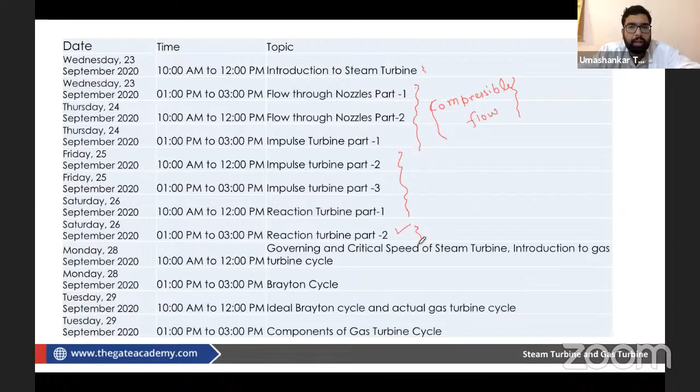So today we are going to finish with the steam turbine, and then we'll be entering the portion of gas turbine. Till this point we had already completed all the things about the steam turbine. Those who are live and have attended the previous lectures can respond to me whether everything is clear or not. We had a day off on Sunday, so I hope you have seen some questions on steam turbines as well.

So we have concluded with the reaction turbine, but there are some more things which can be asked from this topic, so we are going to cover that also. See why we are covering this, because this is what we have seen in theory of machines also, so with less effort we'll be covering more.

I think we must cover the governing of steam turbine also, because a 1 mark or 2 mark theory question can come from this topic. Governing is somewhat related to governors, which we see in theory of machines.

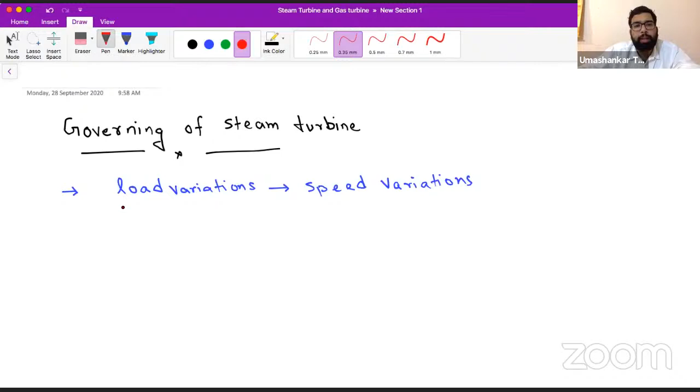We cannot 100% control this load variation. So what we want is a constant speed. Now somebody will say, sir, why do we want constant speed?

Now imagine we have a steam turbine, and it is not giving you constant speed - will it be able to produce electricity? Because this rotation is going to get converted into electricity in the generator part, which is the headache of the electrical engineer. Our work, as a mechanical engineer, is to give constant rotation to the electrical engineers so that they can produce their electricity from there, and then it's their headache what they will do or not do. So we will hand over to the electrical engineers after we give them the constant speed of the shaft of the steam turbine.

So we want to have constant speed. In theory of machines, you see two kinds of devices which compensate and provide you with constant speed - one is flywheel and one is governors. Flywheels are used for intra-cycle fluctuations, meaning due to the varying torque generated at the crank. So to compensate for the speed variations caused due to intra-cycle variations, we apply flywheel. But if the fluctuations are inter-cycle, meaning outside the cycle, like load, because we cannot control our load.

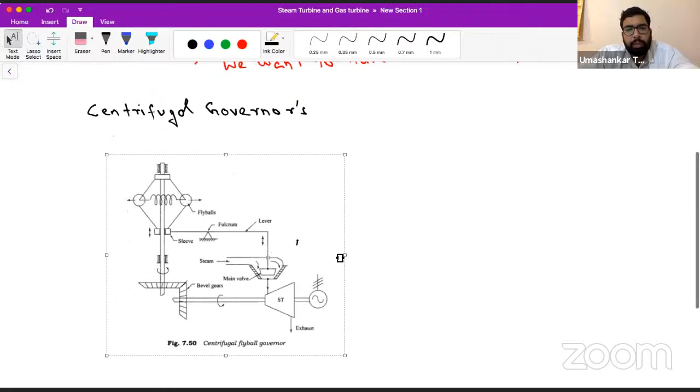We are not going to analyze these governor types in detail, but for basic understanding, let us look at a diagram. To save time, I have taken a screenshot from the book itself. Let's see how a governor works. This is the steam turbine, as you can see.

From this bevel gear arrangement, which you also see in theory of machines, what is happening? Bevel gear connects two shafts which are inclined to each other. Here they are at 90 degrees. This is the shaft of the governor, and this is the shaft of the steam turbine or rotor.

So the governor shaft and the steam turbine shaft are perpendicular to each other. They are connected by means of a bevel gear, with equal number of teeth and equal diameter.

Let's say D1 and D2 for these two gears, having the same diameter and same number of teeth. It means these two gears are rotating at the same speed. In that case, we can call it a mitre gear. You might have heard this term; a mitre gear is a special case of bevel gear.

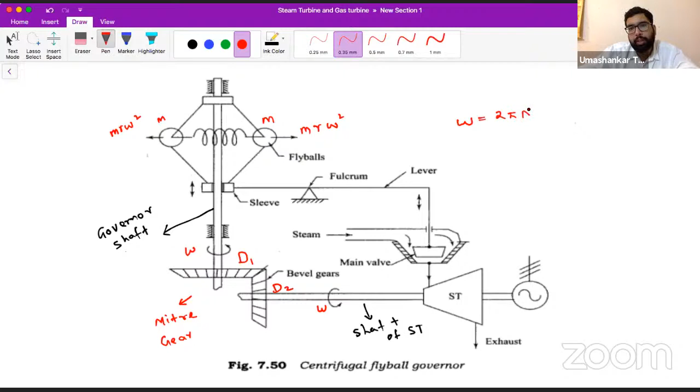There will be some centrifugal force upon it. Let me call it omega instead of n, so we can relate it consistently, rather than saying n is increasing and omega is also increasing. We all know omega equals 2 pi n by 60. So if n is increasing, omega is increasing.

So if the omega of the steam turbine increases from a certain value, what will happen? This centrifugal force will increase. And if the centrifugal force increases, these fly balls will try to move away from the axis. Is that true or not?

So these fly balls, let's say we have our equilibrium position, as shown in the figure. Let's say this is the equilibrium position. We desire this much speed of the turbine, and if our turbine runs at this speed, we are happy.

Got it or not? Okay, we are happy.

Now, if due to some variations the load decreases, let's see what happens. So the load decreases - what will happen to omega? It will certainly increase. So when omega increases, this m r omega square, which we call the centrifugal force, will also increase. When this increases, the fly balls will try to move away from this axis.

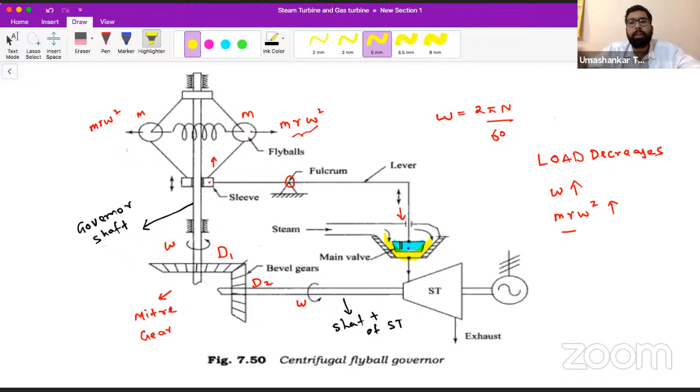Now understand this again - let us copy this figure once more time.

In order to save your time as well as ours, I have taken this screenshot from the book of Dr. P.K. Nag, Power Plant. It's a good book. You also can read through it. And usually in GATE examination, these kind of standard books are referred to create questions.

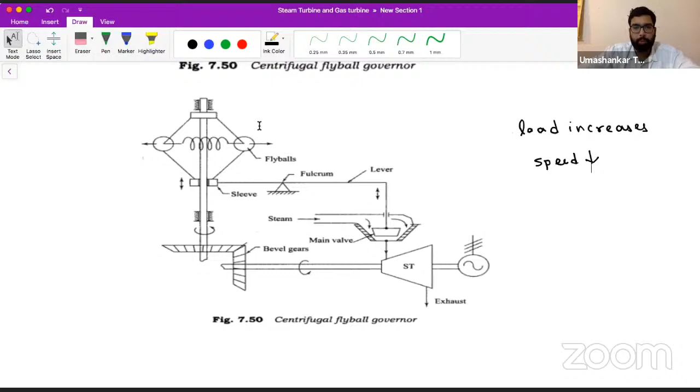Now see. So again, let's say due to some reason, the load increases. Now when the load increases, what will happen to the speed? Speed will try to decrease. So let's say this is the equilibrium position. Let me enlarge this figure a little so all of you can see it nicely. So now if the load increases, the speed decreases, and let's say this is our equilibrium position.

If the speed decreases, you can say this m r omega square is also decreasing. So when this m r omega square decreases, these fly balls will try to move towards the axis. If these fly balls move towards the axis, you can observe the sleeve will move downwards due to this fulcrum and lever.

Just feel it, the sleeve will move downwards, then this lever will go upwards, and this valve will go upwards, opening more of the passage. And since more passage is there for the flow of the steam, more mass flow rate of steam will be obtained at the steam turbine, more steam will enter into the steam turbine, more power will be generated, and speed will again go to its equilibrium position. So this is generally how our governor works.

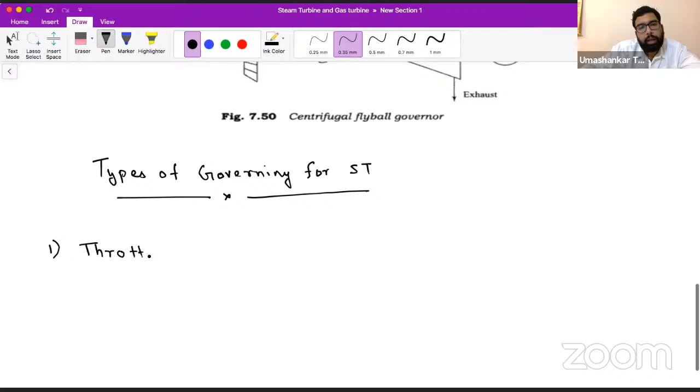Now, what can be asked from this? This is all theory of machines. But what can be asked from a steam turbine point of view? So this can be asked like types of governing for a steam turbine. What are the different types of governing for a steam turbine? So we have first one as throttle governing.

So throttling is a process. Why is it called throttle governing? Because in this the steam is throttled. So see, in this what happens? This kind of governing happens usually when the load decreases. So when the load decreases, we have seen the speed increases. So when the speed increases, what will happen to this valve?

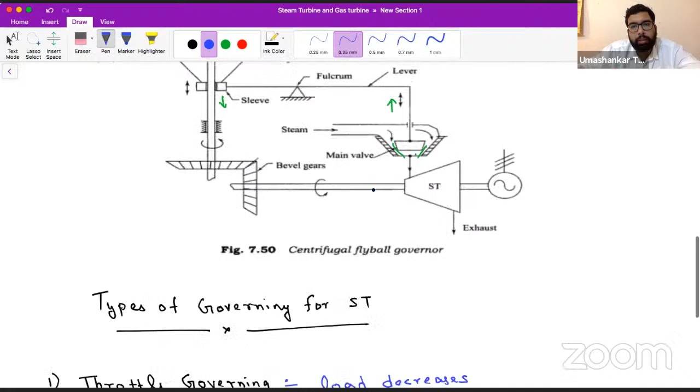This is called a stop valve. So when the speed increases, just realize it, this valve will try to move downwards, with respect to the figure I am explaining. If this figure is made with some other orientation, then it may be moving up.

So I may say the stop valve partially closes the passage. This will be more correct English. What will it do? It will partially close the passage. Is that true or not?

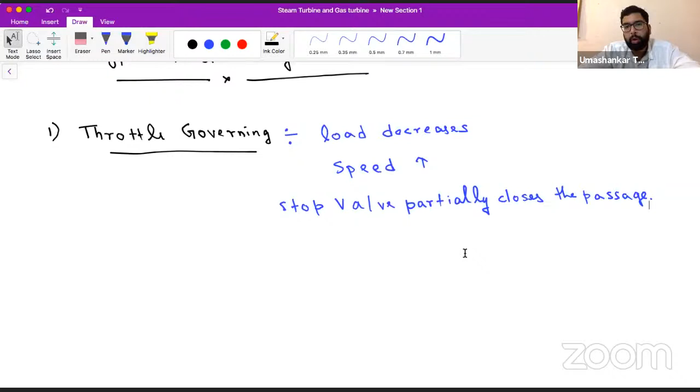Is it true or not? So the stop valve partially closes the passage. Okay. So why are we calling it throttle governing? Due to the restriction in the flow of steam, the steam gets throttled. What will happen is the steam gets throttled from, let's say, from pressure... or let's say the steam gets throttled.

Okay, now tell me, what is the meaning of throttling? We have already seen it in our classical thermodynamics, which is already in the GATE syllabus. So what is throttling? So in throttling, what will happen? Pressure reduces and enthalpy remains constant. Yes or no? Remains constant. This is what we have seen in classical thermodynamics.

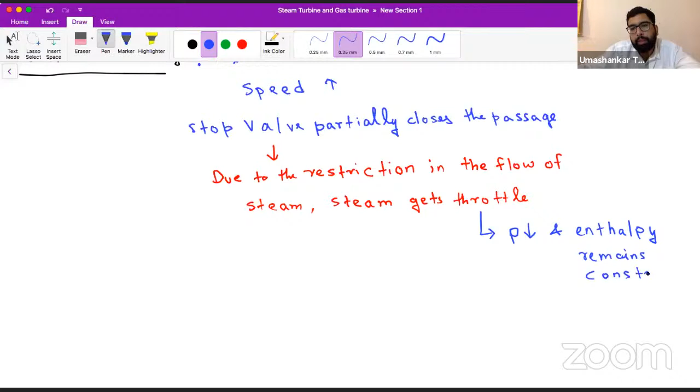As I said, we will be using the concepts we already know. If you go and watch all the sessions, from compressible flow to everything, we have taught you with the very basic concepts: continuity equation, sometimes Bernoulli equation, sometimes the isentropic equation, PV gamma is equal to C. So we are trying to use the general concepts of thermodynamics and fluid mechanics to teach you all this. The velocity triangle we made with the concepts of fluid machinery we already had. So today in this lecture, we are applying the concepts of theory of machines to understand things.

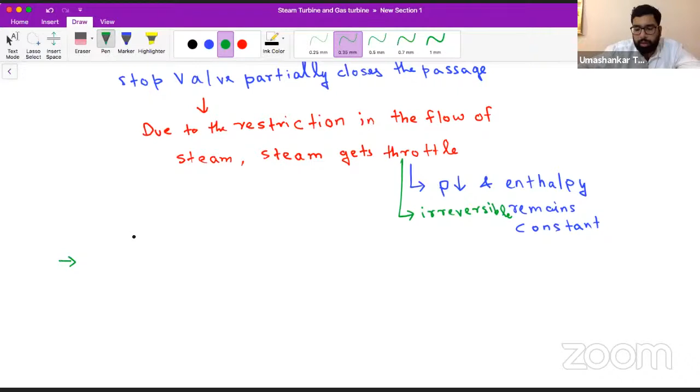So the throttling process, if you know it, is a process of decreasing the pressure at constant enthalpy, and you might also know that it is an irreversible process. So due to this throttling, some irreversibility is coming into our system. And whenever irreversibility comes, we have some loss. So what loss happens due to throttle governing?

Our ideal specific work output decreases. So why does this throttling happen? Throttle governing comes into the picture mostly when the load decreases, because throttling is a process which happens when some fluid is made to flow through a restricted passage. We have seen all this in basic classical thermodynamics. So there is nothing new.

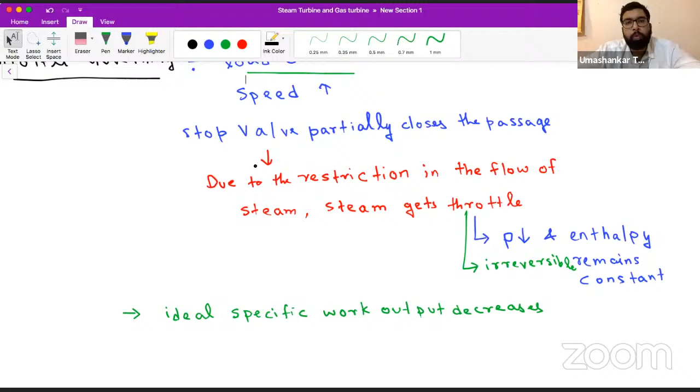So in throttle governing, when the load decreases, the speed increases, and the stop valve moves in a way that the passage is partially closed, and the steam is made to flow through that restricted passage. Hence a throttling process happens here, due to which irreversibility comes. And with that irreversibility, our ideal specific work output decreases. So how does the specific work output decrease?

We can in general say that, as this is irreversible, something irreversible happens in our system. We were considering a frictionless process; now friction came, so definitely it will cause some losses. So from throttle governing, one-mark questions like correct or incorrect statement, identify, or match the following can be asked: what happens in throttle governing, why it happens, when it happens, and what its causes are.

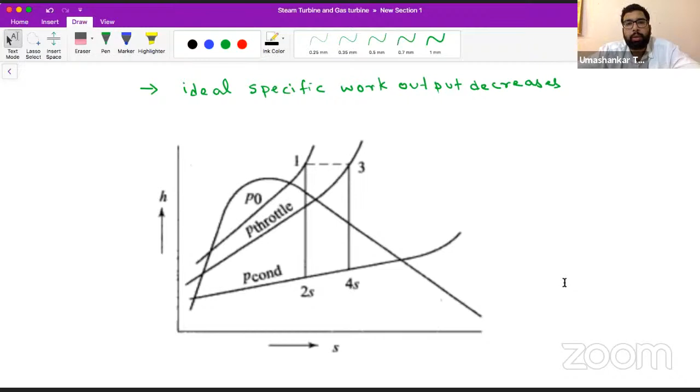Now somebody may have this confusion: sir, I am not able to understand how the ideal specific work output decreases. So for that, I have taken a screenshot from a very good book on power plants written by Dr. P.K. Nag. It's a very nice book. I have taken the screenshot just to save some of your time, because this is a theory part. You may feel bored, but it can be asked, so we have to see it. We have no other option. Okay, so the live students can respond.

Okay, now see, this point 1 represents the pressure before throttling happens. So this is our P1. And at this point we have this enthalpy. This is the HS diagram. So we have this enthalpy, let's say H1. If throttling doesn't take place, from the boiler, this is the boiler pressure that we usually call P0. The topmost line is the boiler pressure, and the bottommost line is our condenser pressure. Okay, so ideally what should happen in a turbine?

The pressure should be dropped from 1 to 2s. 2s represents isentropic condition. Okay, so if throttling has not happened, without throttling, our specific work output from a steam turbine in ideal condition, where isentropic expansion is taking place, is H1 minus H2S.

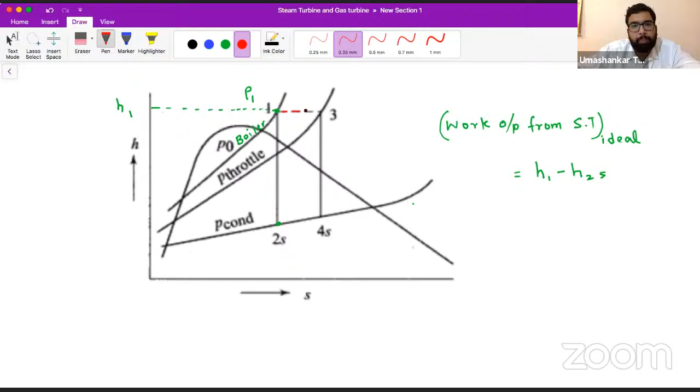But we are now dealing with the practical condition, and due to this governor, throttling happens. So you can see a dash line here. Irreversible processes are represented by dash lines. So this is our 3. So now due to this throttle governing, what will happen? Our pressure will be reduced from P1 to P3.

Okay, as you can see, this is the throttle. After throttle, this line I am marking by red pen represents somewhat lower pressure than the boiler pressure. Steam coming out from the boiler once throttled, its pressure is reduced. So in actual, steam is entering the steam turbine at lower pressure than the boiler pressure.

So what will be the work output after throttling? Ideal work output, even that is also ideal, because we are considering isentropic expansion from 3 to 4s. So now the entry to the steam turbine is at P3 pressure. And as we have told you, throttling is an isenthalpic process, so there will be no enthalpy loss. At 1 and 3, enthalpy will be same, but the expansion we have assumed to be isentropic.

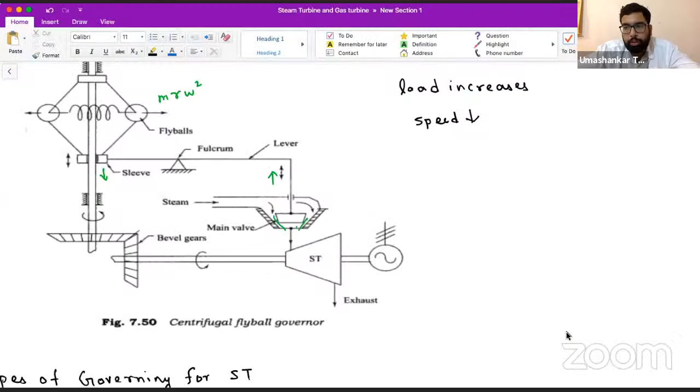Throttle governing: how the work is being reduced. Even a numerical can be framed from here. Okay. These are the things which people generally do not teach in steam turbines, but I feel this is also an important part, because multiple subject concepts are applicable in this discussion. So it can also be a topic from which a question can be asked.

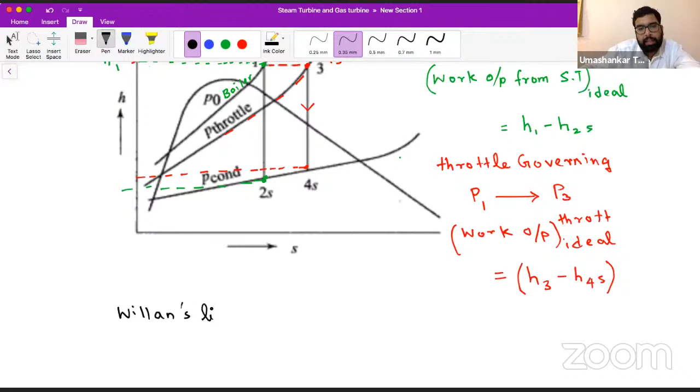Now see, we want to have one more discussion with respect to throttle governing. There is something called the Willans line. Not villain, but Willans. So the Willans line is a plot, it can be asked as a one-mark question, of steam consumption with respect to the load.

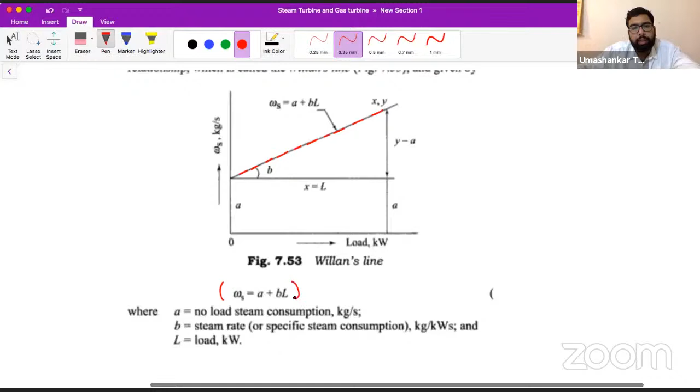To save time, I have taken a screenshot of this from Dr. P.K. Nag's book. This is the Willans line, just so you have some idea, so if it is asked in a one-mark objective question you can respond. This experimental line gives you a linear relationship between the rate of steam consumption and the load. You can see it is a linear relation.

That is why it is called Willans line. So from this you can see that with the load, the steam consumption increases, and it increases as proposed by Willans, in linear proportion, meaning a linear relation. So here you can see, A is what? A is no-load steam consumption. When there is no load, this much steam is required. So that is A.

Okay, and in this line, L is the load, B is the steam rate. So using the Willans line, you can relate A, B and L. So if it is asked in the GATE examination, have some idea about it also. It is a trivial one-minute topic. So we have covered that also.

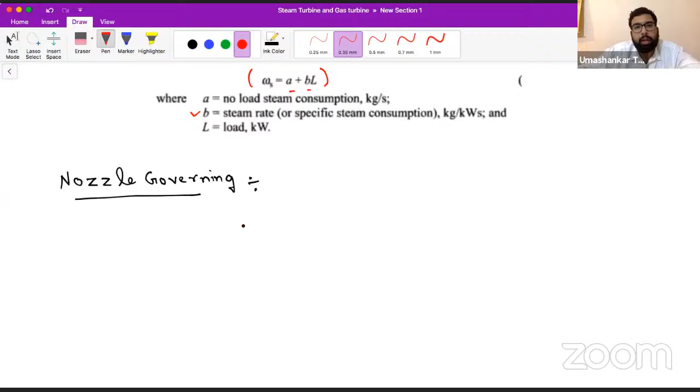Now the next is nozzle governing. So the first question is, when do we use nozzle governing instead of throttle governing? Remember, this can also be asked for one mark. It is preferred over throttle governing in low load conditions, because as you have seen, throttle governing has some losses, so efficiency is definitely going to be reduced, and as engineers we do not want it. So in low load conditions, nozzle governing is preferred over throttle governing.

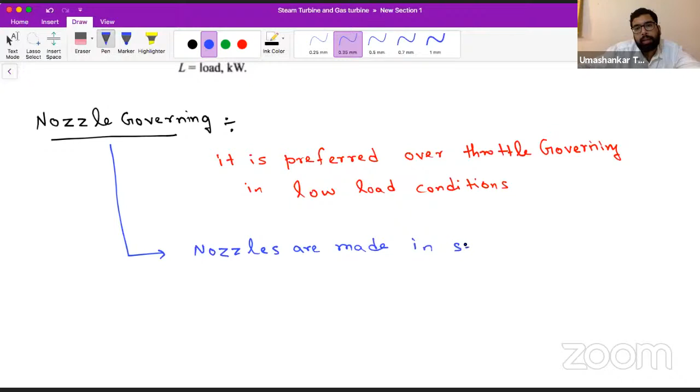So what happens in nozzle governing? In this, we have some sets of nozzles. So we can say nozzles are made in sets, and each set is controlled by a different valve. Okay, so let me show you a figure of nozzle governing, you will be able to understand even better. Again, for saving some time, I had this already ready for you.

So in nozzle governing, as you can see here, we have some sets of nozzles connected to different valves. This set is connected to this valve, and this set is connected to this valve. So now at low load conditions, or when the load decreases, the speed tries to increase. So we need to reduce the steam flow, or the mass flow rate of steam.

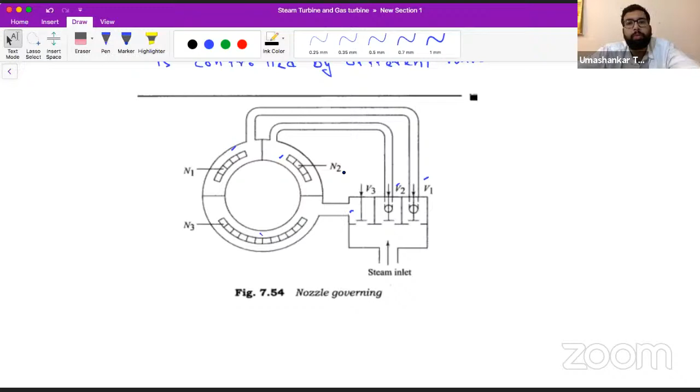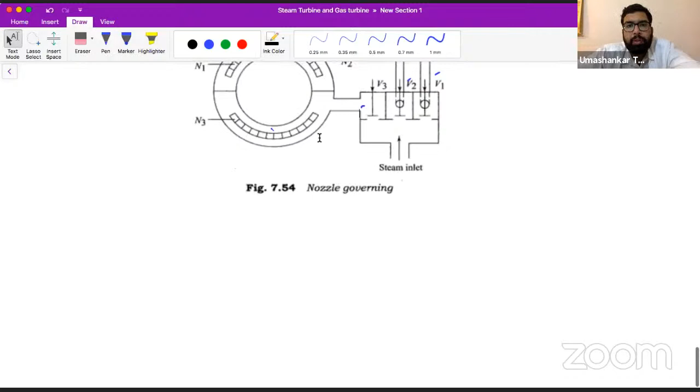In throttle governing, what we do is partially close the valve or the passage, due to which throttling happens and some loss occurs. So in order to avoid it, we sometimes do nozzle governing. In nozzle governing, we simply close some set of nozzles. Then the steam flowing through this set will not go inside the turbine, and hence the steam flow reduces. So nozzle governing is particularly used over throttle governing in low load conditions.

Got my point? So let us move to the third type. These things are very simple, so we are not going to put more time here. We also have bypass governing. Objective questions may be asked from these topics. So now we can do bypass governing as well.

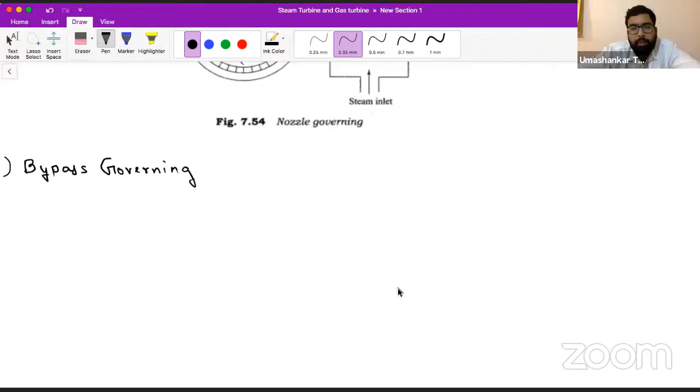So as the name suggests, in bypass governing, what we do... so here you can see the screen again. There was some technical issue.

Okay. So this is bypass governing. Firstly, this is used in overloading condition. So in overload conditions, what will happen? If there is overload, overload means what?

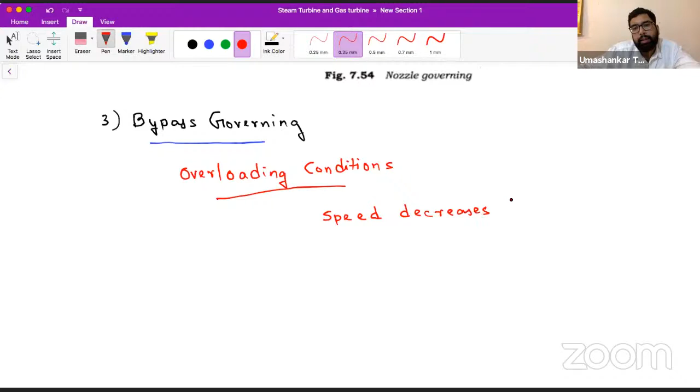Load increases. This happens, but overload means that load has increased to somewhat greater extent. So in overloading condition, bypass governing is used. In overloading condition, speed decreases drastically. So if the decrease of the speed is very drastic, how will you control it?

How will you stop this much reduction of speed? You can say that we can use the bypass governing. By bypass governing, we will bypass some more steam into the steam turbine, and hence the power generated by the steam turbine will suddenly increase, and we can meet this drastic decrease of the speed. Is that okay or not?

Simple. So these can be asked in one-number questions, where bypass, what is the meaning of it? So I think it is understood to you. Live students can respond. Is it clear to you?

And the last kind of governing is emergency governing. I think you know the meaning of emergency. So in case some emergency happens within our steam turbine, within our cycle, within our arrangement, then we will use emergency governors. So in every steam turbine cycle, we have some emergency governing system.

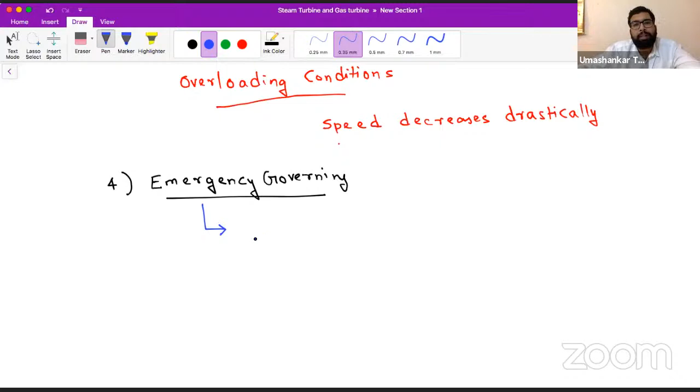So emergency governing, what it will do, it will suddenly stop the flow of the steam. It will stop the flow of the steam, so definitely power generation will be stopped all of a sudden.

So we do it generally when the speed of the shaft increases, or we can say the speed of the shaft exceeds 110% of the rated or specified speed.

So emergency governing, what will happen? The flow of the steam will be completely stopped. So you can say our steam turbine would be shut down. And generally we do it in the condition when the speed of the shaft exceeds 110% of the rated speed.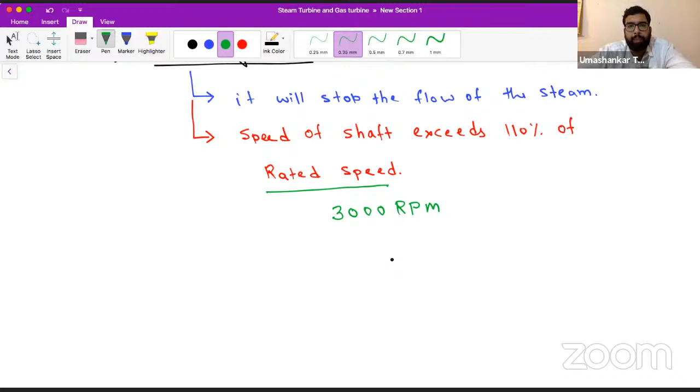So when will the emergency governor generally come into picture? When the speed of the shaft exceeds 110% of the rated speed, meaning, in India, when the speed exceeds 3300 rpm. Got my point?

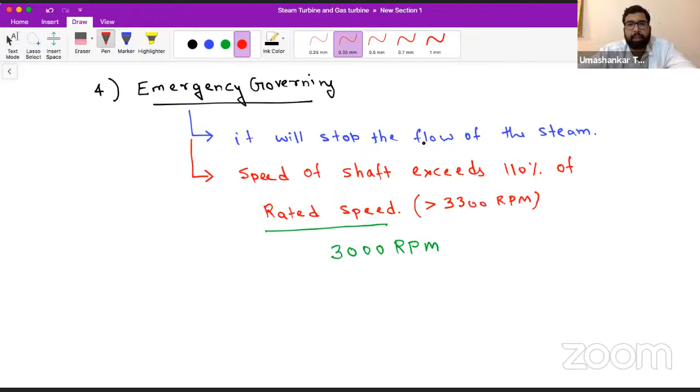So if the speed reaches this value of 3300 and tries to increase even further, the emergency governor will come into play and will suddenly stop the flow of the steam, and hence shut down, and any probable accident will for sure be avoided.

All right. So what are the other conditions in which this emergency governor will come into play? The first condition we already have: when the speed of the shaft exceeds 110% of the rated speed. So what could be the other condition?

If the lubrication system fails, something happens and the lubrication system fails. And you know, steam turbines are in big power plants, NTPC. We are trying to get our job into it, to work into it. If you see an NTPC power plant in India, it's a very huge power plant.

So if the lubrication system fails and still your turbine is working, huge losses and huge wear and tear can happen, and your whole plant can go into maintenance mode or be out of function. So if the lubrication system fails, the emergency governor will stop the flow of the steam and shut down the whole system. Then you can repair it and start it again. That will be a better thing to do.

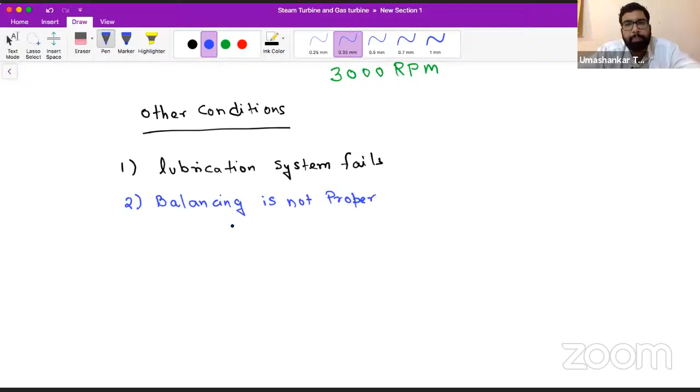Balancing is also asked in GATE 2016. If balancing is not proper, sometimes more vibrations come, or some balancing mass has gone out of place. Something has happened - practically many things can happen. So if our balancing mass goes out of order or balancing is not proper, we have to stop the turbine and correct it before some kind of accident happens. In that condition also, our emergency governor will come into play and will stop the turbine.

What else can happen? Sometimes the condenser becomes too hot. These are all the general conditions in which we use the emergency governor. So emergency governing is a kind of safety precaution, a safety measure one should take in a steam turbine power plant, so that there is no accident and no bigger losses in our power plant. If the condenser becomes too hot, it means the supply of cooling water is not proper, or something like that happens. So we have to suddenly stop the steam turbine in order to save this big equipment from a bigger or major wear and tear.

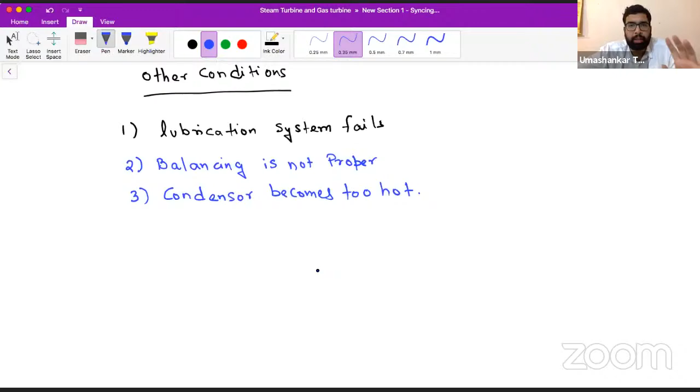So we use emergency governing. Is the governing of steam turbine clear to all of you? What are the methods, what is the general way? If an objective question comes from here, will you be able to answer? Those who are live can respond to me. We are covering this steam turbine in all possible respects, so if anything is asked from you, you will be able to answer. Got it or not? Tell me, those who are live can please respond.

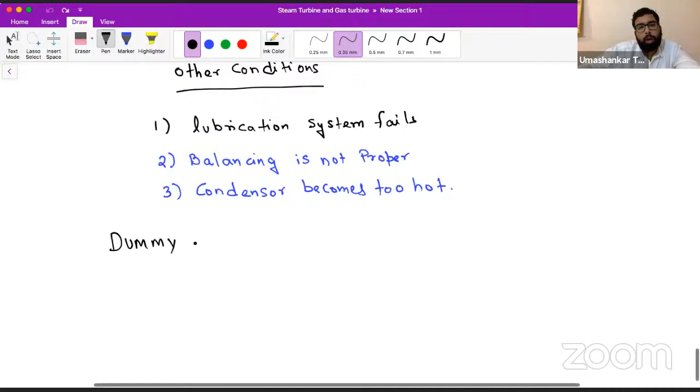Now there is one more thing - we call it a dummy piston. We are not going to analyze this in detail, but if some objective question is asked from here, you will be able to answer. So, dummy or balanced piston - as the name suggests, this thing helps us in the balancing of our steam turbine.

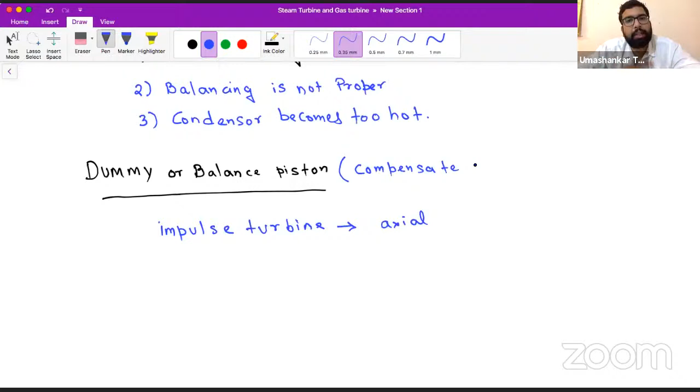We have seen all this in previous sessions. In impulse turbine, the rotor moves due to the impulsive action of the steam, so axial forces are less. This dummy piston is to compensate for or deal with the axial forces. As you know, steam turbines are axial flow devices, and so are the gas turbines we are going to enter. In gas turbine, we are not going to do the velocity triangle analysis of the blade again because we have already done that in case of steam turbine - the same concepts are applicable, but gas turbines are not generally impulse kind, they are reaction turbines, and reaction is usually less than 50%.

If the same steam turbine concepts can be applied, what is going to change? We will tell you, but we are not going to make the velocity triangle and everything again. In this dummy or balanced piston, they compensate for axial force. In impulse turbine, axial force is less, so generally dummy piston is not used there - a question can be raised from here. Dummy piston is not used in impulse turbine generally, although in reaction turbine, what we have seen is that reaction turbine works with combined action of impulse as well as reaction.

Combined action of impulse as well as reaction happens in the moving blade. Due to this reaction force coming into picture, axial forces are generally high axial forces.

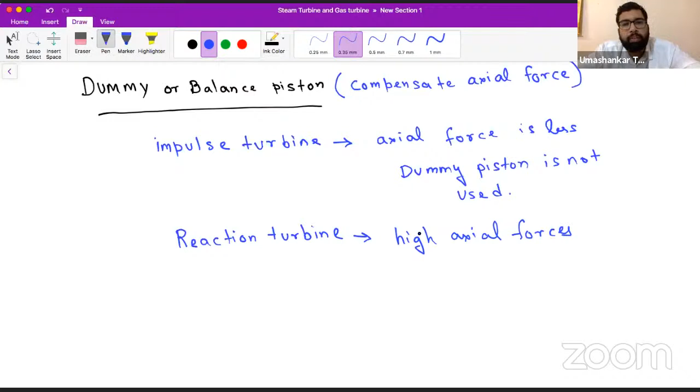In the previous session, we have seen all this, and we have seen the use of Parsons turbine, the 50% reaction turbine. So why do we prefer Parsons turbine? We prefer it because in Parsons turbine, the axial forces are somewhat nullified.

In reaction turbines, due to high axial forces, sometimes the axial forces are so high that our rotor can come out of the shaft while in work, while producing power. If this happens, a huge accident can take place, and human life will be in danger.

So for that, we use a dummy piston. Reaction turbines have high axial forces, so the use of dummy pistons is generally there, which are applied just like a balancing mass.

It will take care of the high axial force in the reaction turbine and will reduce the chances of this huge accident where the rotor may come out of the shaft. You can imagine, while working, if a steam turbine rotor comes out of the shaft, what will happen? So we generally use this dummy piston in case of reaction turbines where axial forces are very high.

This much we are going to see on this, because for objective question analysis it is not required, as we are already seeing much more. So this much is sufficient.

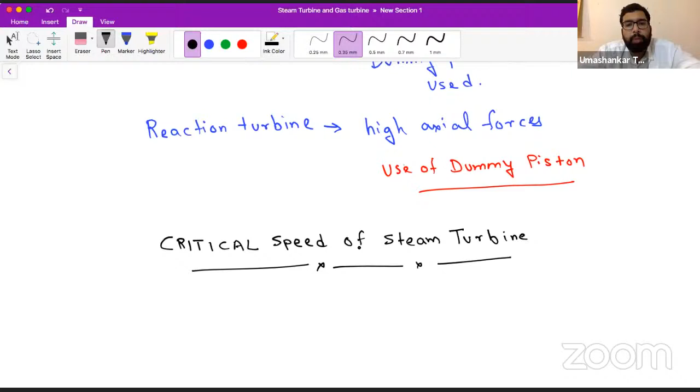So again, combination of multiple subjects are used in this analysis of a steam turbine. We have seen till this session that we have applied the concept of classical fluid mechanics, we have applied the concepts of classical thermodynamics, and now we have applied some concepts of theory of machines. That's why we say that this topic is so very beautiful, that the IIT professors who want to frame questions of the GATE 2021 examination may obviously choose from this topic.

So critical speed of steam turbine is what we have seen in the theory of machines vibration part. So let's just quickly cover it.

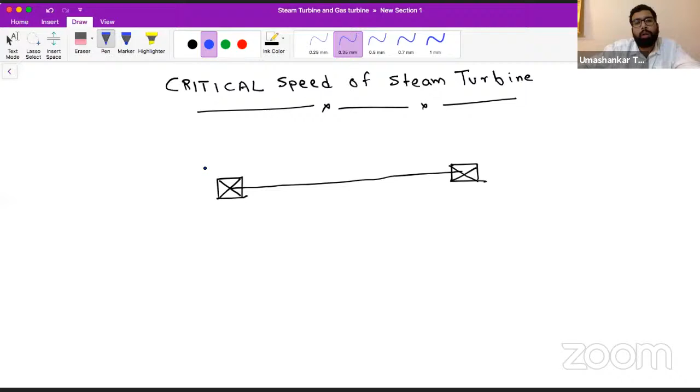Let's say we have a shaft - this is our steam turbine shaft. In practical conditions, generally the axis of the shaft does not coincide with the axis of rotation. So there is always some eccentricity - we can call it delta, or we can call it E, whatever you want. Let's call it delta.

So there is always some eccentricity of the shaft from the axis of rotation. Let's call it delta. We have seen all this in the vibration part, so I am making it very quick. Let's say it is rotating, and in practical condition, let's say it has some amplitude or deflection, a small deflection of y.

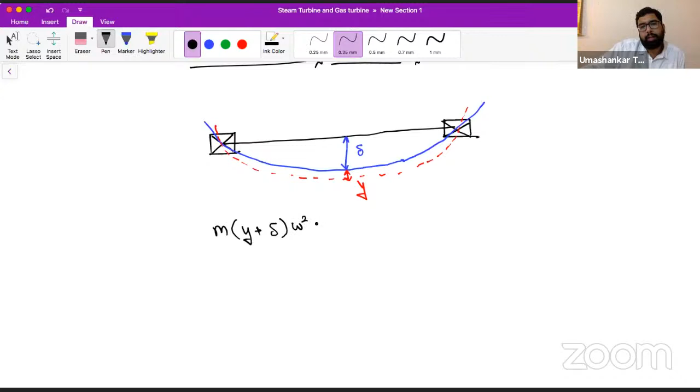So let's just quickly make the balancing of the existing forces. There is a centrifugal force, and there will be a stiffness force, so force of stiffness will be S into Y. If I deflect this shaft while rotating by Y, we get this equation.

From this equation, we can certainly do what? Let's open the brackets. So we have m y omega square plus m delta omega square is equal to S into Y. From here we can say that we have this.

Let's say we have taken this Y as common, so it will be m omega square. Just see it, m omega square. Let's just call it E - otherwise you will confuse with the deflection, no? So we are calling it E. Whatever you want to call this eccentricity, there is no problem at all. Let's call it E, no problem. Otherwise some people will get confused here.

So this is E, let's say. So we have m omega square minus S, or let's just write it like this. Otherwise we have one more step that will increase. So let's say S minus m omega square.

S minus m omega square. Here we will be left with m omega square. So if I take m omega square common here and send it there, it will be like this: S by m omega square minus 1. We have seen this relation in the vibration part also.

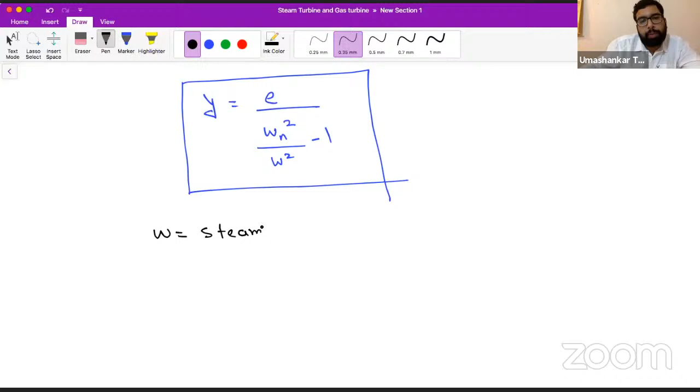So from here we can say that Y is e upon S by M is omega n square minus 1. Let's just see it. This is our Y. So omega is the speed of the steam turbine, and omega n is under root S by M, that is the natural frequency. You call it the natural frequency.

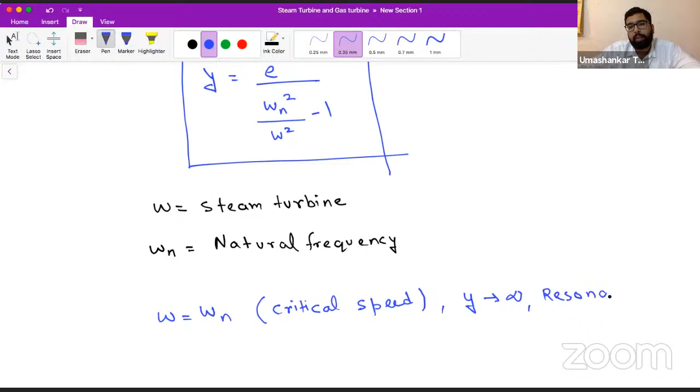So if omega becomes equal to omega n, it will be a critical speed. We call it a critical speed. What will happen? You can see from this relation that when omega becomes omega n, Y will go to infinity. This condition you call in vibration as resonance. So if Y goes to infinity, some accident may happen, because deflection is reaching infinity. You can imagine what will happen. So we must avoid this.

We must ensure that our steam turbine does not run at its critical speed.

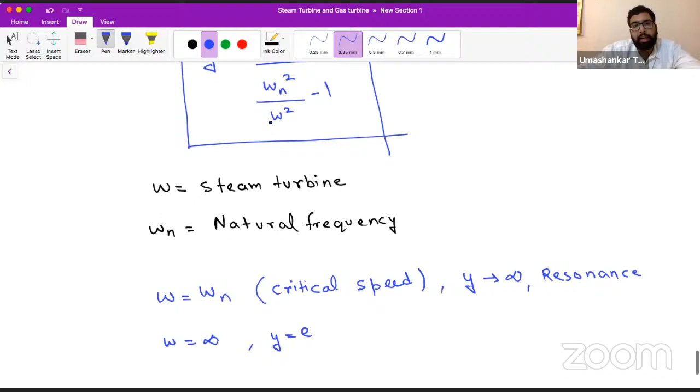And as I have said, for e to be zero, omega should be infinity. See from the relation, if omega is infinity, Y is equal to e, or Y will be equal to e. Or we may say, we are putting infinity here, so it will be zero. So e will be zero. So if you want no eccentricity, you must run your shaft at infinite speed, which is not possible.

So this is the critical speed. We must ensure that our turbine does not run at this speed.

So while designing the diameter of the shaft, this critical speed concept must be taken care of. This critical speed concept must be taken care of.

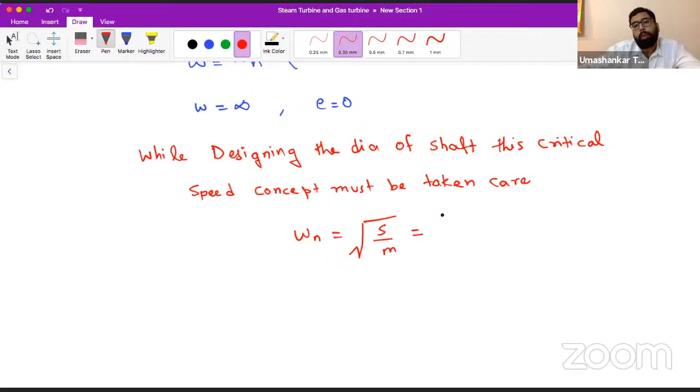It must be taken care of, because you know omega n is equal to under root S by M, or there is one more equation, we say G by delta. This equation we use in theory of machines. You know delta is equal to WL cube by 48 EI when the shaft is simply supported. You know all this, no? Now some concepts are applying.

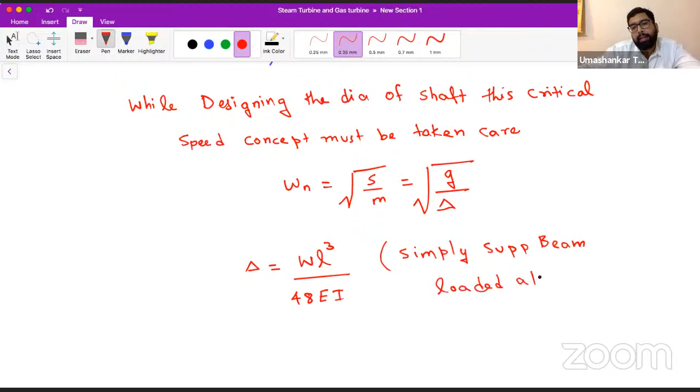So for a simply supported beam loaded at center, I is equal to pi by 64 d to the power 4. So from here you can have the idea, you can have an expression for diameter also. So while designing the diameter of the steam turbine shaft, you must consider this also.

So is that clear? Is this critical speed governing concept clear to all of you? Say yes or no.

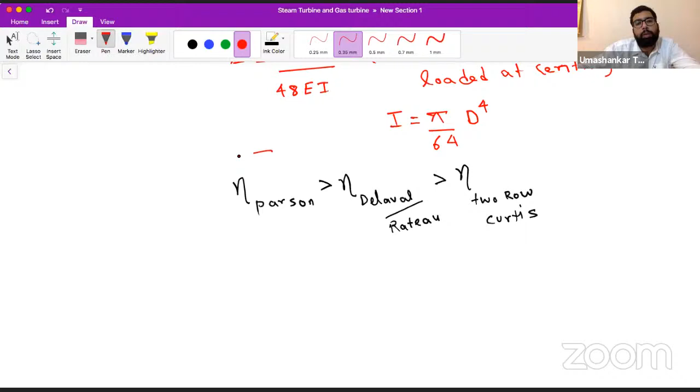So hereby I am concluding this steam turbine with this last thing: if it is asked between the efficiencies, the efficiency in the same conditions will be highest for Parsons, ratio-wise we have seen, and the lowest will be of the two-row Curtis turbine. So this can also be asked - whose efficiency is highest, whose is lowest.

So with this last thing, let me conclude this steam turbine. At this point in all this lecture series, we have been seeing this steam turbine in all respects. We have covered compressible flow also here. So steam turbine and compressible flow are completed from my point of view.

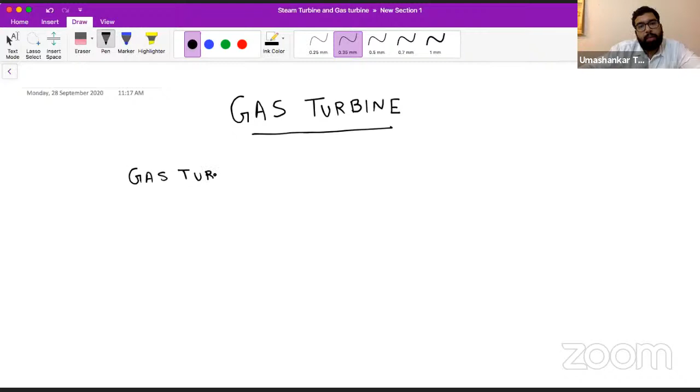Okay. So this is also added in GATE 2021 syllabus. So the combined topic is steam turbine and gas turbine. So here in this particular section, we are not going to analyze the gas turbine specifically, but we are going to analyze the gas turbine cycle. In general, ideal cycle, then we'll move to the actual gas turbine cycle. Because gas turbine as an equipment is similar to the steam turbine. It is also axial flow, so all the velocity triangles and everything we have seen already.

All right, and also we have seen the compressor. Compressors were there already in GATE syllabus; it was also added from GATE 2016. So in compressor, you see an axial flow compressor. So gas turbine follows the same kind of blading, same kind of velocity triangles as we see in axial compressors. Okay, so as far as equipment is concerned, we are not going to analyze the gas turbine because it will become boring. We already have seen the same type of thing.

As I was teaching the steam turbine, velocity triangles were quite similar to what we have seen in fluid machinery. Already in this series I have told all of that, so we are not going into that. So firstly, let us see what is the gas turbine cycle. We are going to analyze the gas turbine cycle, and at a later point of time we will see the actual gas turbine cycle.

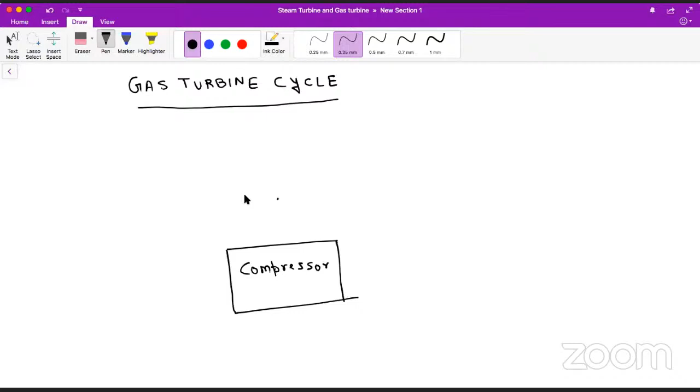Okay, so now in a gas turbine cycle, there is a compressor. What we have? We have a compressor with us. So how is it going? So we have a compressor. We have a combustion chamber. Then we have a gas turbine, which is quite similar to the steam turbine we have seen.

Okay, then we have a condenser. No, not condenser. Terms like condenser, boiler, evaporator we use when we are dealing with two phases, but in a single phase we cannot use those terms. So we use terms like cooler, combustion chamber, heat exchanger when we deal with a single phase region.

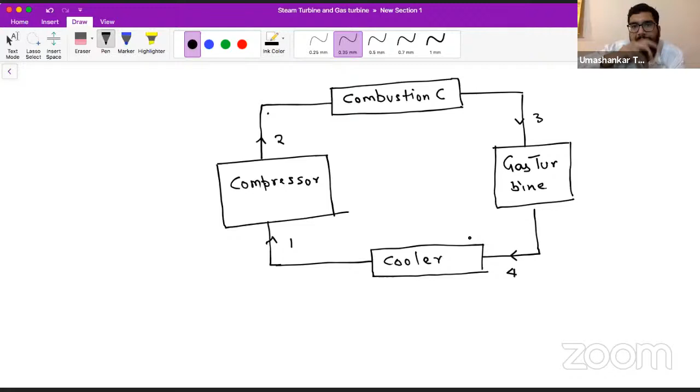So what happens in a gas turbine cycle? Let's say this is point 1, this is point 2, this is point 3, and this is point 4. Okay, so air or some gas. This is the gas turbine cycle. Generally we use air or some light gases.

So as compared to steam turbine power plants, gas turbines are lighter in weight, because the fluid you are handling is lighter. So definitely the arrangement will be lighter, not that bulky as you see in a steam turbine. In a steam turbine, the whole thing becomes very bulky because we are handling water, so the equipments are generally large, and the weight of the overall system goes up very much.

So in gas turbine, we are using some lightweight gas or air. So these kinds of cycles are used in aircraft also. So it is sometimes called the aircraft cycle, aircraft power cycle, air power cycle. These kinds of words are used with gas turbine cycles. Since this is already in GATE syllabus, to reach the actual turbine cycle, we need to analyze this first.

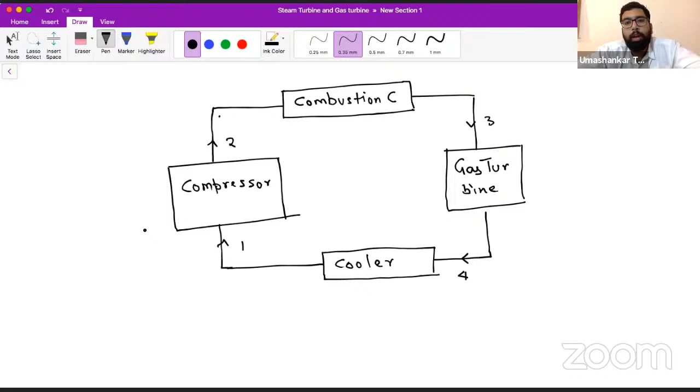We require to see the ideal gas turbine cycle, which is also called the Brayton cycle. So what will happen in general, not ideal, not actual? What happens in the compressor? The pressure of the gas, say air, flowing through the compressor will increase. Then it will go to the combustion chamber. So definitely some heat addition will be there.

Definitely some heat addition will be there. Some heat rejection will be there. So whenever heat addition and heat rejection take place, some work will be produced. So this gas turbine will produce some work also, WT.

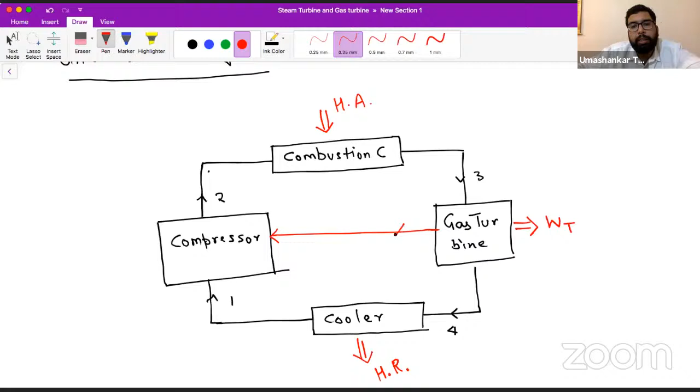But part of this WT will be required to run this compressor, because in the steam turbine case, the pump does not require a high amount of work, but in case of the compressor, almost 40 to 50% of whatever work is produced by the gas turbine is consumed by the compressor. So from this WT, some WC will go to the compressor.

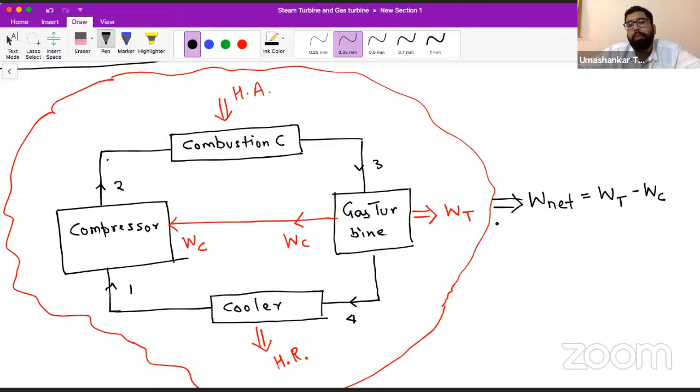So if I encircle all this, what is actually coming out from this encircle? We are getting our net work, which is turbine work minus compressor work. So we are actually getting at the end this net work, that is turbine minus compressor work.

And as we know, we are required to find the efficiency. So efficiency is what? Output. So what output we are getting? Turbine minus compressor work, upon what input we are giving. We are giving the input as heat addition. Okay, so this is the general system, general cycle.

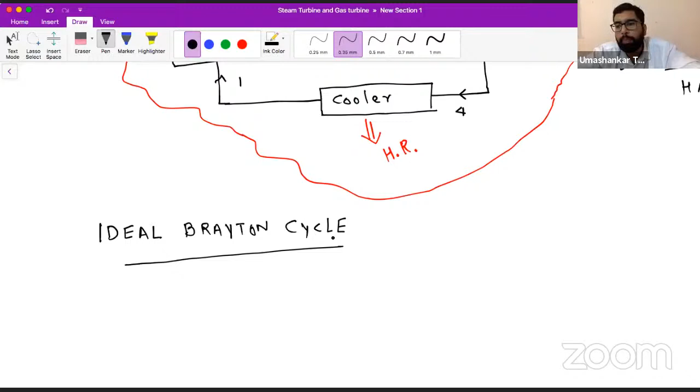So let us just first understand the ideal cycle, that is called the ideal Brayton cycle. A gas turbine cycle works on the Brayton cycle. So let us see what is the ideal Brayton cycle. This is all what you have seen also in your power plant, which is already in your GATE syllabus. But for reaching the point where we see the actual gas turbine cycle, we need to analyze this also.

So our ideal Brayton cycle will follow the air standard assumptions. So the air standard assumptions are: Cp, Cv, and gamma. Cp is specific heat at constant pressure, Cv is specific heat at constant volume, and gamma is the ratio of specific heats. So Cp, Cv, and gamma do not change with temperature.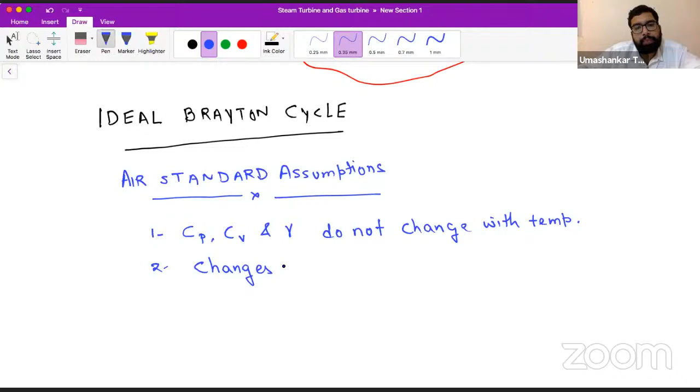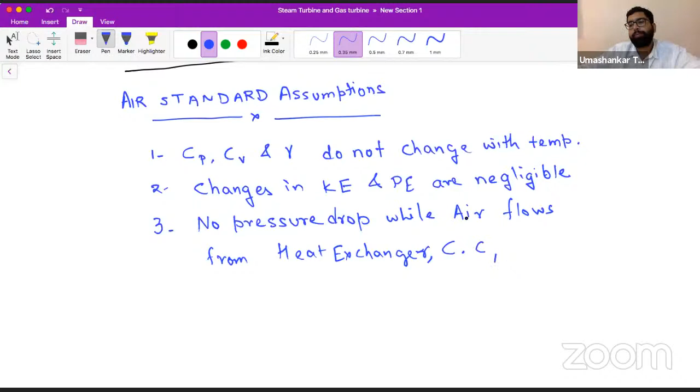Also, we consider that changes in kinetic energy and potential energy are negligible. What else we consider? We consider there is no pressure drop while air flows through the heat exchanger, combustion chamber, cooler, and various ducts. So we consider that there is no pressure loss, but in actual condition there will be some pressure losses while fluid flows through them.

So if there are no pressure losses, heat exchangers, combustion chambers, and coolers are considered as constant pressure devices. So heat exchanger, combustion chamber, and coolers are considered as constant pressure devices.

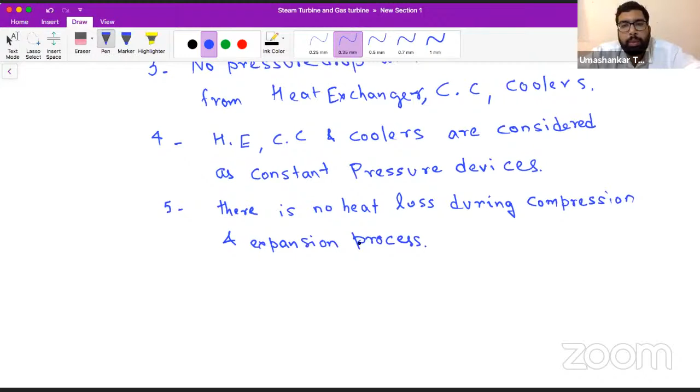Also, there is no heat loss during compression and expansion processes. So we can say that compression and expansion are isentropic. So this is what the air standard assumptions are.

So firstly, see now how this lecture series will flow. Firstly, we will analyze this ideal air standard cycle, or ideal Brayton cycle. Why do we do it? Because only when you know what is the ideal condition, what is happening in the ideal cycle, then only you will be able to get what happens in the actual cycle.

So when we move to the actual cycle, we will see that these assumptions will no longer be valid. So if some of these assumptions are not valid, how to proceed, how to solve, we are going to see. But for that, firstly, we have to understand the ideal Brayton cycle. We have to see its special cases, and we have to solve some questions on it also. Otherwise, you will not be able to get the actual gas turbine cycle.

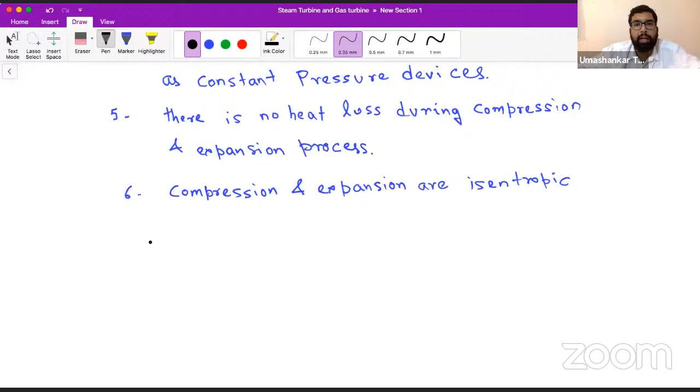So first, let us make the PV diagram. In the steam turbine part, I have not taught you about the PV diagram and TS diagram mostly, because there I was trying to teach you the steam turbine as a device, but here I am treating the cycle. And if you relate this cycle concept to your steam turbine cycle, you will have the idea. So if you watch this series, the complete old syllabus and new syllabus is mostly covered, more or less. So now we draw the PV diagrams considering all these.

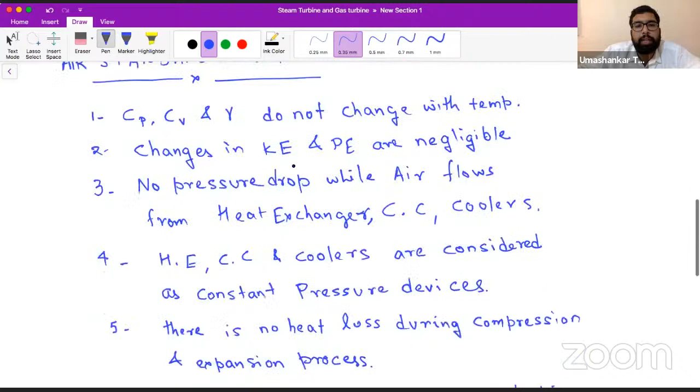2 to 3 is constant pressure heat addition. See it here. If constant pressure heat addition is taking place, pressure will not change, but volume will increase. From 3 to 4, what is happening? Isentropic expansion is happening. So if expansion is happening, volume will increase and pressure will decrease. And 4 to 1 is constant pressure heat rejection. In constant pressure heat rejection, pressure will remain constant and volume will decrease.

So this is the PV diagram of ideal gas turbine cycle or ideal Brayton cycle, considering all the air standard assumptions. All right. Now see, if you see the tendency of the cycle, it is clockwise. So from the classical thermodynamics, we know in a work producing cycle, this tendency should go clockwise. So you can cross check. So this is definitely a work producing cycle.

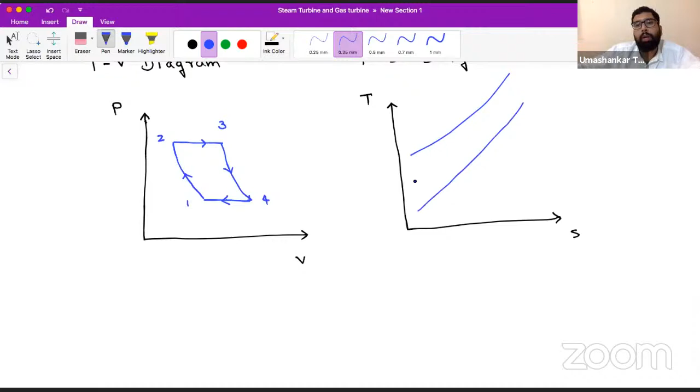So if I make the TS diagram now, we have two pressure lines over which the whole play is happening. So let's say we have the two pressure lines like this. So from 1 to 2, what will happen? Pressure is increasing, so temperature will increase, and as it is an isentropic process, entropy will remain constant. Now 2 to 3, what will happen? Constant pressure, heat addition.

Yeah, definitely. I will solve the regeneration problem. Okay, Ish. I will explain the regeneration, as well as, if you guys require, we'll solve some problems of regeneration as well. Don't worry. Okay.

So 2 to 3 is there. This is the next pressure line. So 2 to 3, what is happening? Constant pressure heat addition is happening. When constant pressure heat addition takes place, the temperature increases and the entropy increases. This information we have from classical thermodynamics.

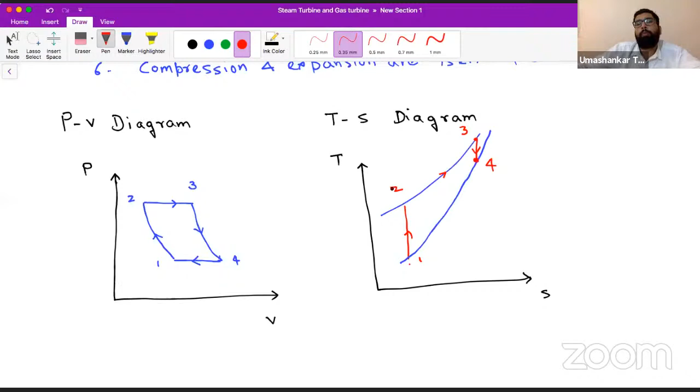So in 3 to 4, what is happening? Isentropic expansion is taking place from 3 to 4. So entropy will remain constant, pressure will reduce, and so the temperature will also reduce. So from 4 to 1, what is happening? Constant pressure heat rejection is taking place. So in constant pressure heat rejection, temperature will reduce, entropy will reduce. So we will come back to our 1 point.

And here also you can see the tendency of the cycle, which is clockwise, which again gives you the idea that this is a work producing cycle. So I hope this ideal cycle PV and TS diagram is clear to all of you. Why do we require all this? Because we are going to compare it with the actual gas turbine cycle. So that is why I am saying, firstly, we must understand,

yes, T4 is greater than T2. While making the TS diagram, please try to make it like this, where from the diagram itself you can see that T4 is greater than T2. Because in a later stage of this section, we are going to see regeneration. Regeneration can only take place when T4 is greater than T2. Otherwise, it cannot take place. So that is why we are considering T4 greater than T2, so in future we won't make any mistake. All right, Pawan? Okay, now let us move and find the efficiency of ideal Brayton cycle.

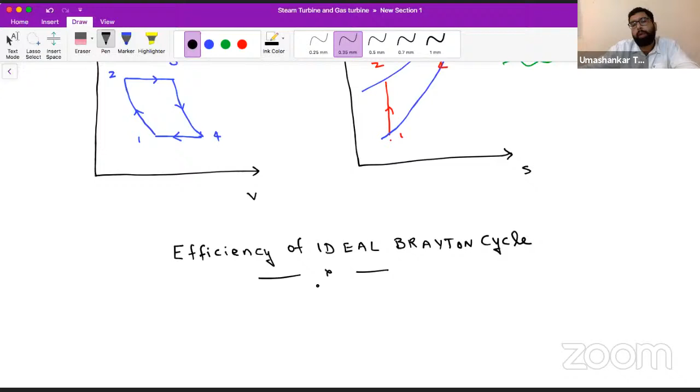So in order to find the efficiency of this ideal Brayton cycle, we are required to apply some basic concepts of general thermodynamics. I hope all of you know some of the basic thermodynamic concepts. So we will apply those and you can recognize that yes sir, we know it. Okay, so let us do it with the help of the TS diagram.

So how am I making the TS diagram? First, we are making these two pressure lines. From 1 to 2, isentropic compression is there. In compression, temperature increases and entropy will remain constant, as it is isentropic compression. So just take care that T4 will come above T2, and here it goes to T1. So this is our cycle. Got it?

Got it or not? This is our cycle. So now let us apply some basic concepts from thermodynamics. We are required to find the efficiency.

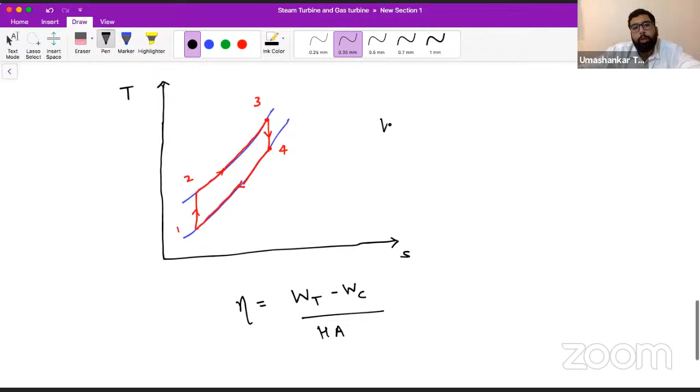So efficiency, as we have established, is turbine work minus compressor work upon heat added. If I talk about the turbine work here, turbine work is H3 minus H4. From the steady flow energy equation we can have this. Okay, let me apply it if you do not remember it.

So we have this turbine, we already have used it multiple times in our discussion of steam turbine. Let's say this is 3 and this is 4. So SFEE: H3 plus V3 square by 2 plus gZ3. What are our assumptions? That we are neglecting the kinetic energy and potential energy.

So let's just write the SFEE once again. H3 plus V3 square by 2 plus gZ3 plus Q is equal to H4 plus V4 square by 2 plus gZ4 plus W. All right. Now just have a look at this assumption: the changes of kinetic energy and potential energy are neglected.

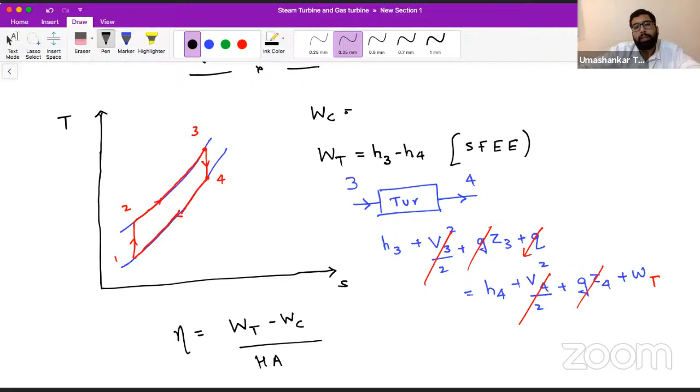The process is considered to be isentropic, so there is no heat transfer, as it is written here, no heat loss during compression and expansion. So Q we can neglect. From here we can say the work of this turbine is H3 minus H4. So we have H3 minus H4 minus compressor work, and compressor work will be H2 minus H1.

Similarly, if you apply a steady flow energy equation between entry and exit of a compressor. So we have H3 minus H4 minus (H2 minus H1). Okay. Now what is this heat addition? This heat addition is H3 minus H2, because heat addition is taking place between 2 and 3. All right?

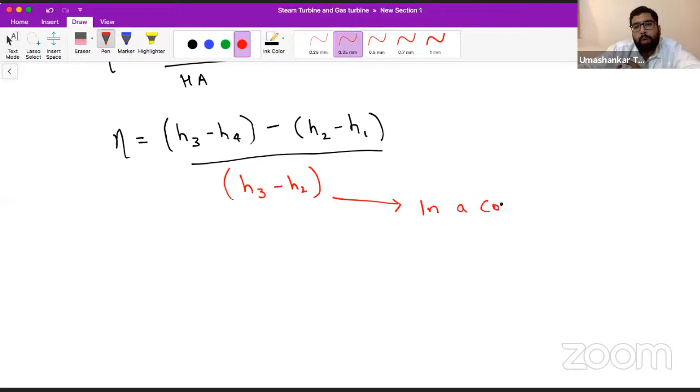So this is not from the steady flow energy equation. From which concept am I directly writing the enthalpy difference? If you know classic thermodynamics, in a constant pressure process, heat interaction is equal to dH or mCp dT. This is what we learn from general basic thermodynamics.

So from basic thermodynamics, in a constant pressure process, del Q is equal to dH, mCp dT. For a constant volume process, del Q is equal to dU, mCv dT. Got my point or not? So I have written this efficiency in terms of enthalpies. Let me just convert it in terms of temperature. For an ideal gas, air is an ideal gas.

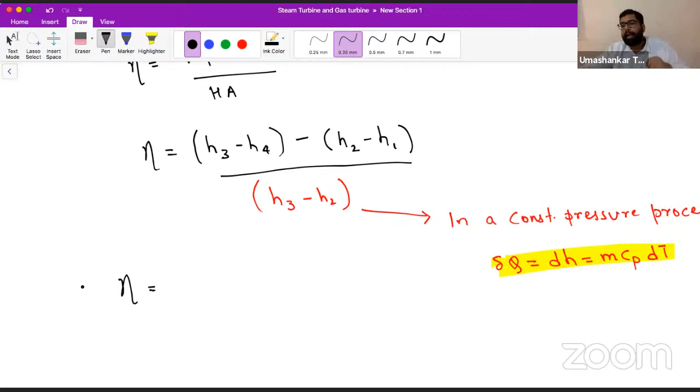You want me, Pavan, to write SFEE for the compressor? Okay, let's do that also. Let's say we have a compressor. Entry to this compressor is at point one, exit at point two. So we have H1 plus V1 square by 2. I will not write V1 square and all because we are going to neglect it. So I'm just writing H1 plus Q is equal to H2 minus WC.

Why am I putting minus here? Because compressor work is the work done upon the system. In a turbine the work done is by the system. When we have work done by the system, we take it positive. When we have work done upon the system, it is negative.

So in a compressor, we have to give work. Work is being done upon the system, so I am writing minus here. As the process is isentropic, there is no heat loss, so we can neglect Q and we have WC as H2 minus H1. All right, Pawan? H2 minus H1.

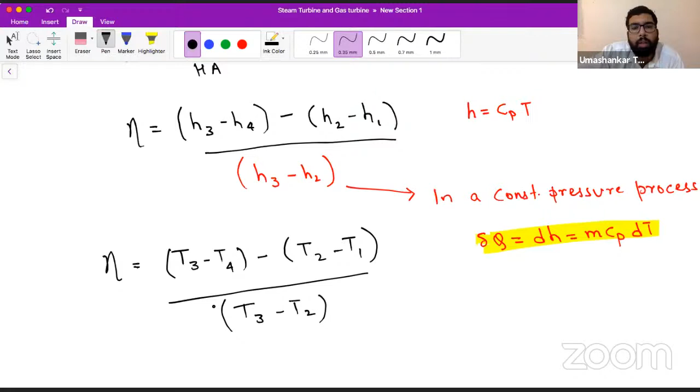Now I am going to convert everything in terms of temperature. Enthalpy is a function of temperature for air, so everywhere we can use this expression H equal to CP times T. Just put it everywhere. CP will be cancelled out because it will be in the numerator as well as in the denominator, so we will have this equation like T3 minus T4, T2 minus T1, and H3 minus H2 will become T3 minus T2. If you have all these temperature values in an ideal Brayton cycle, you do not require anything else. You can have your efficiency.

We are going to stop here in this session because now we have to develop this efficiency formula. We will begin from this point in the next session, which is going to start from 1 p.m. today.

So do come in the next session also. Please watch the next video, because we are going to analyze this ideal Brayton cycle, see the efficiency and the effect of changes in pressure ratio on it. We will also cover regeneration, intercooling, and the reheater, and then see all of them combined. Then we'll go to the actual turbine cycle, what happens in an actual gas turbine cycle, and lastly the components of the gas turbine cycle, which will be the end of the series. So three more sessions are left, and in those we will conclude this series.

I hope those who are watching every session or coming live are enjoying this series and feeling it is useful. Those who are live can respond to me, and if there is any doubt, you can ask me. Otherwise we will end this session and meet again in the next live session.